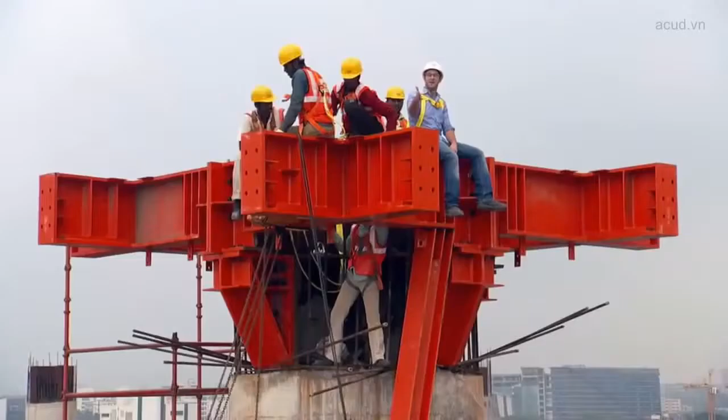My name is Danny Forster, and this is Build It Bigger. Here we go. As a designer, I have traveled the globe investigating amazing feats of architecture. And right now, I'm going to take you inside a building that is going to transform India.

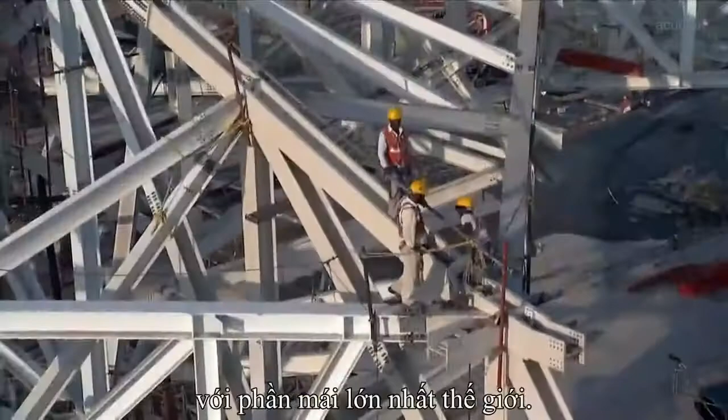Mumbai, the densest city on the planet, is remaking the most delayed airport in the world. The space challenges are enormous, yeah. A radical $2 billion airport to handle over 36,000 more flights a year. 12,000 workers are erecting a massive new terminal with one of the largest roofs ever built, held up by one of the most complex steel structures ever conceived.

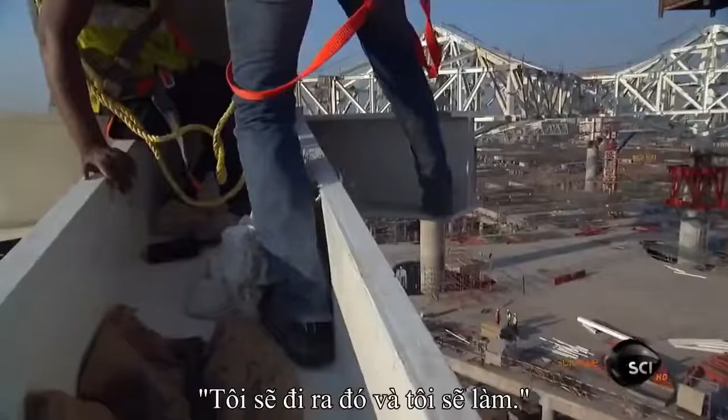God, look at that thing on top of that thing. That is amazing. All right next to an active runway. That's the airfield. That's literally where the planes land. Without canceling a single flight. Oh, I'm going out there, Winnie. I'm doing it. Are you kidding me?

So I just traveled 13 hours by plane to get here, and now I'm in Mumbai. With over 20 million people living here, it is the densest city on planet Earth. Located on the western coast of India, the city of Mumbai lies on an island just 3/4 the size of New York City, with more residents than the entire state of New York.

It's the financial capital of a country on the rise, generating nearly half of India's foreign trade. In about 3 years' time, India is going to surpass China to become the fastest growing economy in the world. But despite this incredible economic opportunity, India's infrastructure is crumbling. Only 40% of homes have running water. The majority of roads remain unpaved, and Asia's oldest railway carries 3 times its capacity.

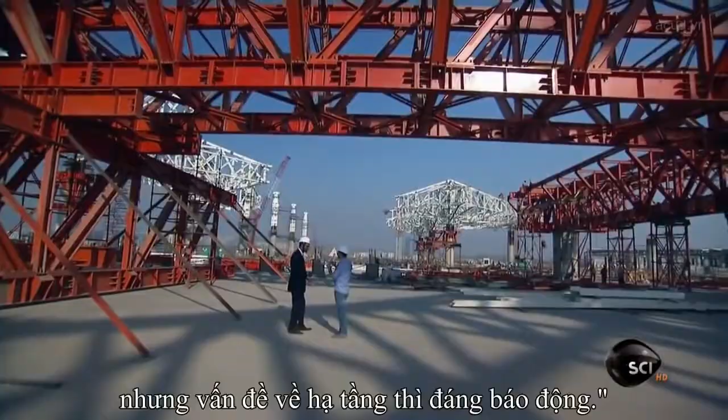There's the reality that economically the city is growing very rapidly, but that the infrastructure challenges are very serious. Mumbai has grown very rapidly and has a potential to become a world-class city. I think, any place you can rejuvenate it, and you need a catalyst for change. An important catalyst for Mumbai's $195 billion resurgence is also in the worst shape.

Chhatrapati Shivaji International Airport. Of their 650 daily flights, only half of them arrive on time, meaning that the city's only airport is in desperate need of an upgrade. So in order to sustain the city's growth and keep people coming back to Mumbai, they're embarking on one of the most complicated infrastructure projects in India's history. They're building a brand new airport.

Designed by SOM Architects, a revolutionary 4 million square foot terminal, topped by one of the largest roofs in the world, designed to handle 100 more flights a day, nearly doubling the airport's capacity to 45 million travelers each year. All built on the same spot as the country's second busiest airport. No one's ever built an airport in this tight a space.

Absolutely. And so in 4 years' time, the passenger capacity of this airport doubled. Doubled, exactly. So based upon the growth of the existing Mumbai airport, you couldn't stop it while you built the new terminal. We could not stop it. It's like doing an open heart surgery on a marathon runner while he's in the middle of a marathon.

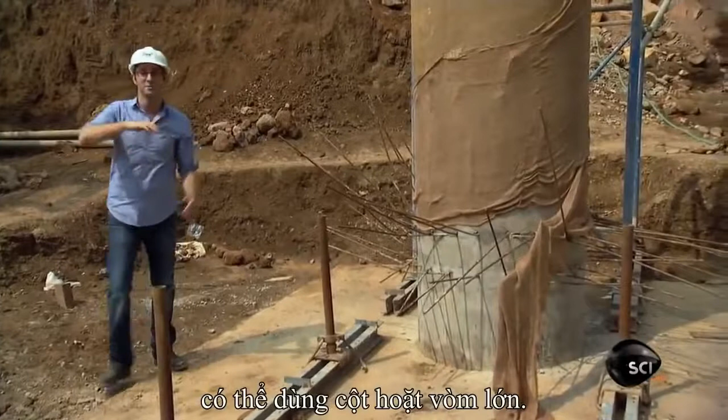Now, how you hold that roof up, whether it be through columns or huge arches, is what makes one airport different from another. Now, here in Mumbai, their roof is 17 acres in size, which means their columns are no ordinary columns. And today, we're going to build something called a mega column.

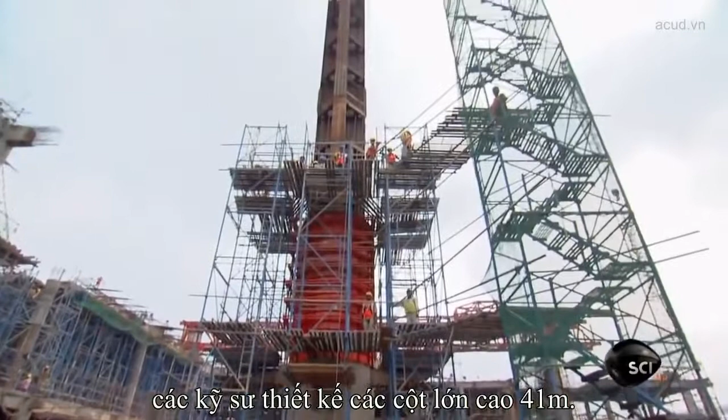This terminal roof is covered by a skin-like thermoplastic membrane spanning more than 10 city blocks. To hold up all 15,000 tons of it without compromising the space below, engineers created 135-foot-tall mega columns. So steel on the inside, and then we wrap that steel in a shell of concrete.

Right. This column itself, from foundation to the top, is taking at least 3.5 months to complete one job. 3.5 months to do one column. One column. I gotta tell you, I've seen a lot of columns in my day. I've never seen a column like that.

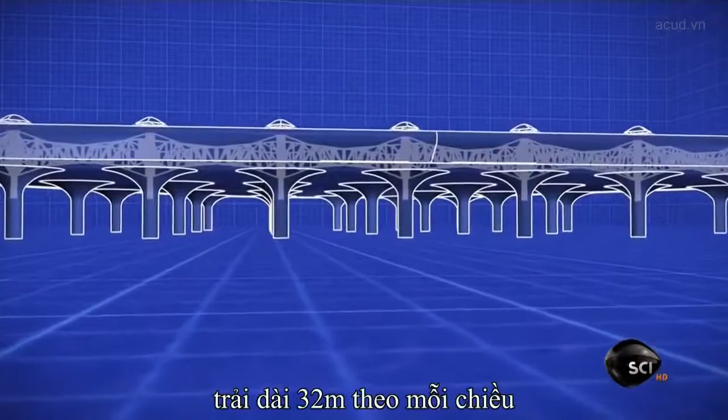Architects wanted to limit the number of mega columns to create openness inside the terminal. Typically, a roof this large would require 60 mega columns, one every 100 feet. Instead, they added flared steel caps called pods to top each of the mega columns. Spanning 105 feet out from the center in either direction, the pods transfer loads laterally and then down each mega column, allowing engineers to remove 30 mega columns and create a more open space for passengers.

So this incredible shape, this amazing umbrella shape, is not just because it looks cool. Correct. You're also able to give the people traveling a cathedral-like interior space. Right. It is a state-of-the-art design, and at the same time, it is a beautiful structure. These are incredible columns. Yeah. The whole project quite literally rests on these columns. And Mumbai is resting on that too.

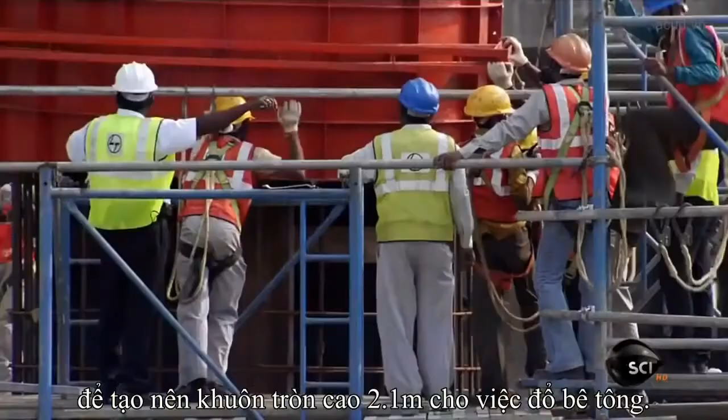With only 30 mega columns, they have to build each one strong enough to support 2,000 tons. Starting with a nearly 8-foot thick steel spine, it's reinforced with 10 tons of rebar. Crews then install the formwork, attaching 2 C-shaped steel sections to create a 7-foot-tall circular mold for the concrete.

Okay, so Uni, these right here, this is the actual formwork that we're putting onto the column. Correct. And this is just half of the formwork. This is half. Uni, these are very large columns. It is a very, very large column.

You and I could get an apartment in New York City together, and this would be our living room. And that would be a good apartment, Uni. We'd be happy about it.

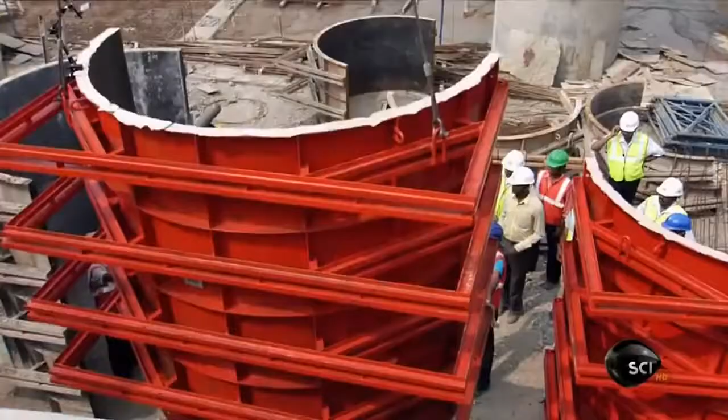Here we go. I got it. Because each pour requires 40 tons of concrete, this piece of formwork is made from 6-inch thick steel weighing 30 tons. It's heavier than I thought, huh? The tower crane lifts it 115 feet over the job site and into position. Now, this piece of formwork in the sky is not just going alongside the column, but rather over top it, sliding all the way down in position, just about right there.

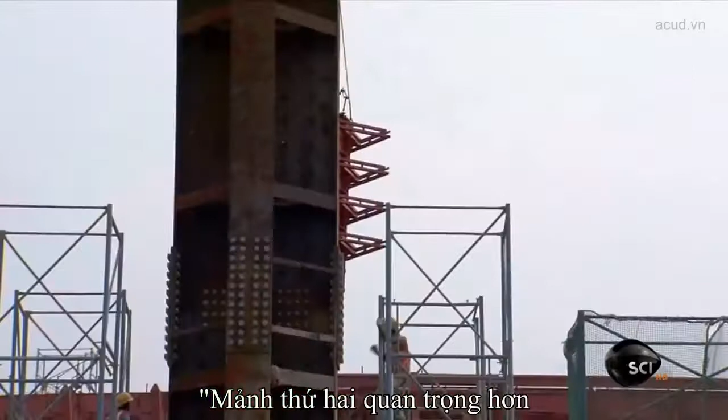With the first half of the mold in place, crews then lower the second half and connect the two together. The second piece is the most important. If you don't place it properly and if you don't bolt it properly, the alignment will get totally mismatched and it will be a mess of a job. So if the alignment of the formwork is not correct, the subsequent concrete pour is misaligned and the performance of the column is degraded. Yes, ma'am. Correct. Okay, let's get up there, baby.

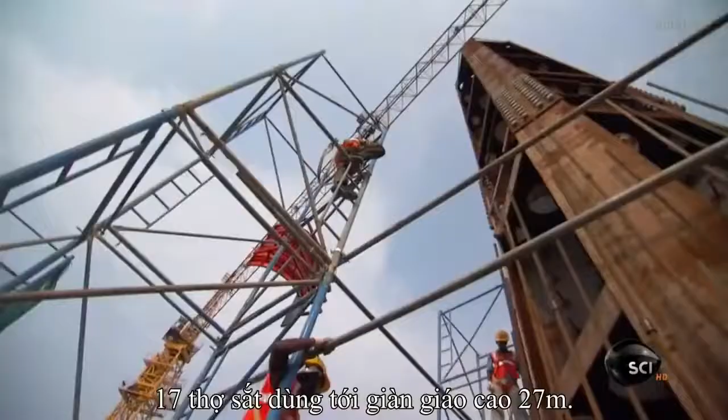Here we go. To guide this piece of formwork into place, 17 ironworkers spread out on aluminum scaffolding 90 feet off the ground, pulling it in with just 2 tag lines. Push karo. All right, I got it. Aane de. Not loving that. Push karo. Very good. Come on. Yeah, give it a push. Oh, the wind is trying to force this thing out. Very good. Come on. Yeah, perfect. We threaded between the scaffolding and steel a narrow 12-inch gap.

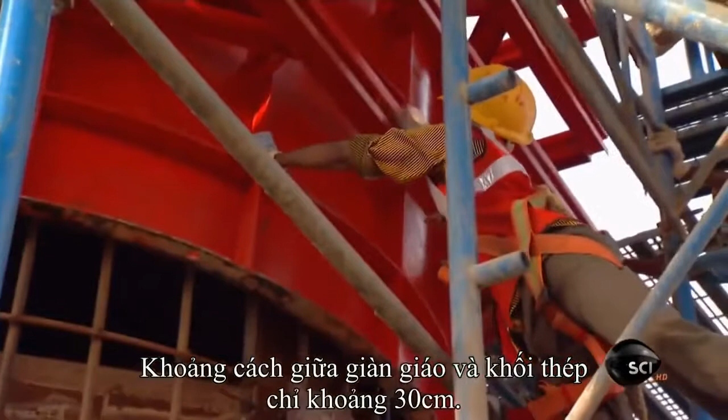Okay, here she comes. So as you bring it down, the idea is to keep it essentially where you want it, about 3 inches off the rebar. Panic process. You can hear it when tying off, retying. Essentially trying to move alongside this thing as we drop it. Whoa! But not the most amount of foot room. All right, come down more.

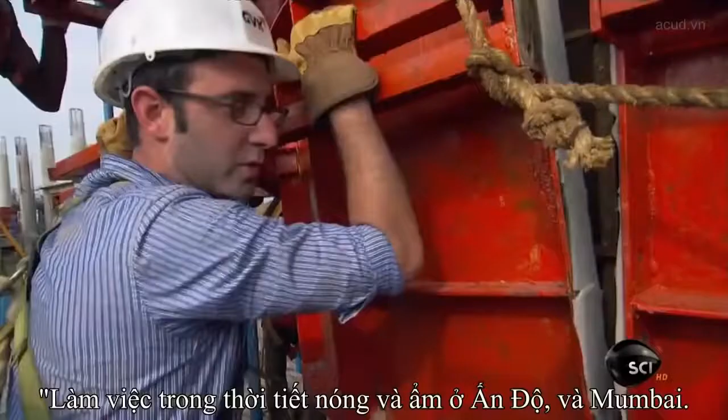With just 2-inch wide scaffolding for footing, they have to line it up within 1/10 of an inch, all in the sweltering 95-degree heat. You're working in India, in Mumbai. It's extraordinarily hot and humid, so while you're running and pushing and pulling, I mean, it's brutal. It's unbelievably brutal. Slowly. With no room to swing the crane, it takes all 34 hands to align the steel formwork. At this point, it's really about dudes with their arms, their legs, and their feet just physically holding it in place and lining it up.

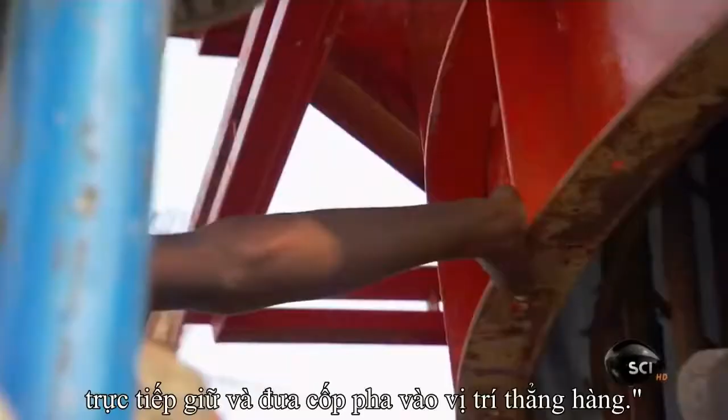Myself included. Arya. Okay. Arya. What does Arya mean, by the way? Bring down. Arya is down, all right. Arya. It's coming in. Yeah, it's about inches away. Very good. Coming in. Wow. There it is. Very nice. Look at this alignment right here. 2 holes practically lined up. The bolt's gonna pop right into place and bring these 2 pieces together.

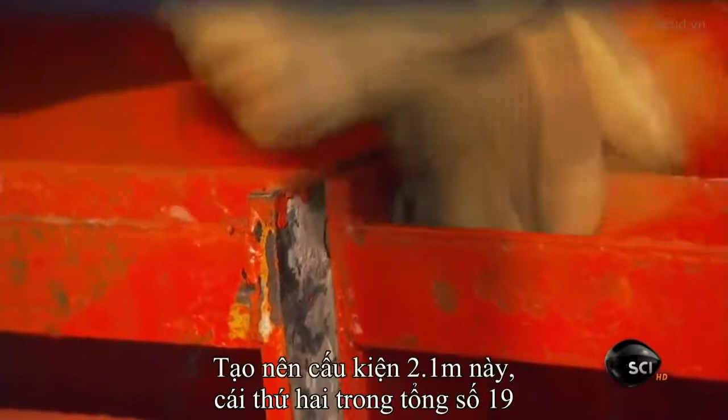Give me a bolt. 70 bolts lock the formwork together, making this 7-foot section the second of 19 that will come together to create a single mega column.

Now, lest you forget you're on a job site in Mumbai and one of the most amazing projects ever built, when they do something incredible, what do they do to celebrate? Have a cup of tea. Unbelievable. We're seriously having tea right now? Cheers, my friend. Cheers. Thank you, Danny. Amazing. I'm not gonna lie, I'm kind of hot. I could have gone for like a Gatorade or something.

Coming up, building one of the world's largest temporary structures. If you look at these bolts, it's like a 10-pound dumbbell. You do not want to drop the bolt. 200 feet above the job site. Oh, oh. Don't drop the bolt.

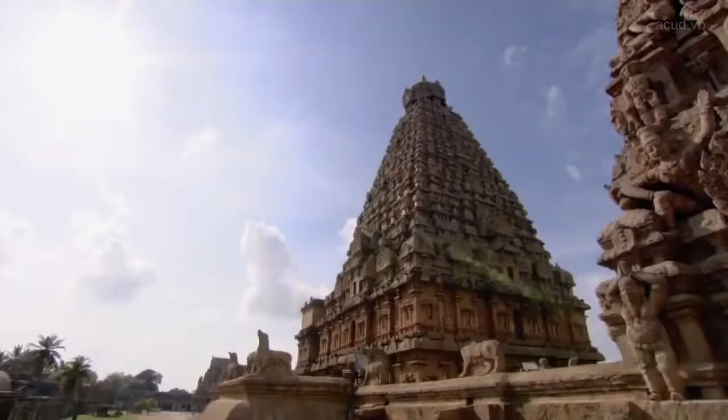India is the birthplace of Hinduism, the world's oldest religion. And with over 330 million deities and growing, countless shrines line Mumbai, honoring both immortals and mortals like Chhatrapati Shivaji, whom the city's new airport is named after. Chhatrapati Shivaji was a 17th century ruler over this portion of Western India. Now, he was so revered by his people that he was elevated to the status of a god.

Now, what do you do if a statue of that deity just happens to be located right smack in the middle of your construction site? Well, you build around it. On most construction sites, builders would use up to 10 tower cranes to lift and complete this 17-acre roof in just 8 months. Here, keeping the shrine open to worshipers means keeping cranes out of this 6,000 square foot area right in the center of the entire project.

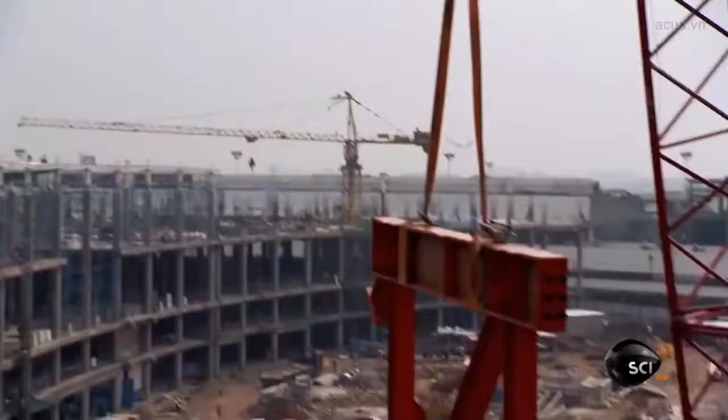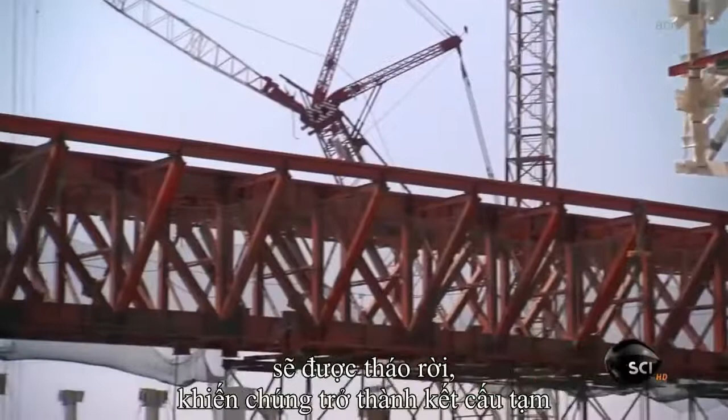With cranes restricted to the perimeter, engineers designed an amazing solution. A quarter-mile elevated track called a highway truss, composed of over 4,000 individual steel segments. This unprecedented rail system allows crews to move structural caps called pods atop all 30 megacolumns without blocking access to the shrine below. Once the roof is finished, this entire 1,270-ton structure will be taken apart, making it one of the largest temporary structures ever built. And right now, they're installing piece number 1,000.

So you actually invented this system. You designed it specifically because the site is so constrained with housing over there, the airport over there, with Chhatrapati statue over there. You just have no room to work. Absolutely right. And to work with this kind of constraints, it is very challenging assignment for all of us. You cannot take a crane inside, you cannot take any lifting machines. Everything is depending upon this highway truss.

Let's do it. You ready? Yeah, we are ready. Okay, I'm ready. Uni obviously is born ready. Look at the face. Okay. Was there ever an image of preparedness more so than Uni?

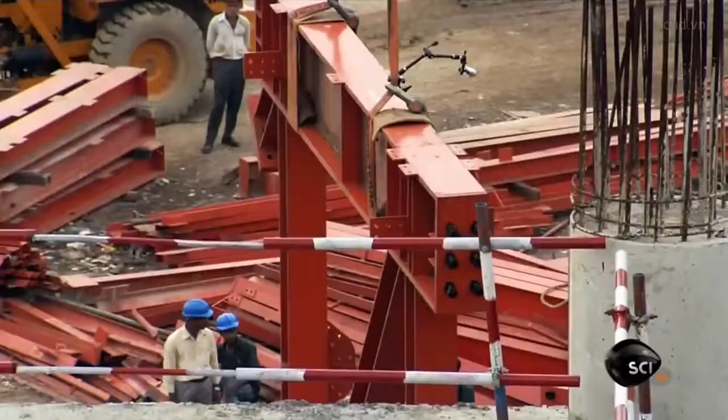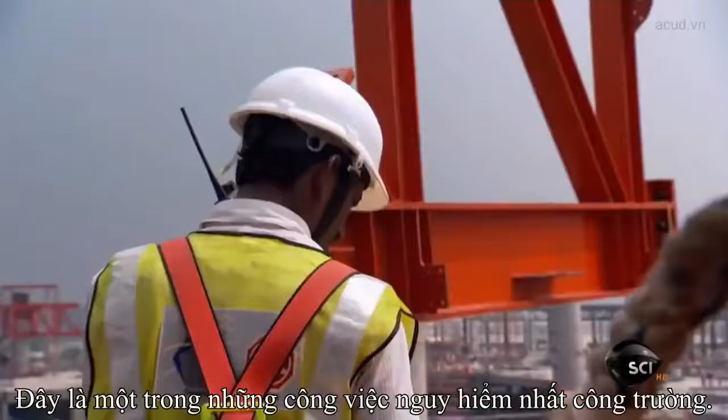All right, going up. There she goes, nice and easy. And what's so incredible is that this huge piece of steel above my head right now looks like it's for a bridge or a skyscraper, but that whole thing is just temporary. This piece will eventually support the 275-ton steel pod. All right, let's go. But at the moment, it's the lack of steel 200 feet up that's making this one of the most dangerous jobs on site.

Okay. Whew. All right, so just to put in perspective, behind me is the airport, right? We're actually over top the airport, and what I'm walking on right now is the actual highway truss.

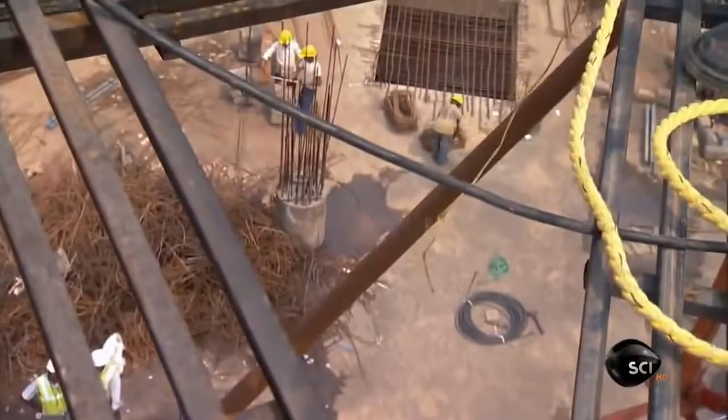Oh, you gotta be kidding me with this, fellas. Uni! Sorry, extremely sorry. Exactly. I understand your difficulties. Fellas! Yeah! That is a rough spot. Someone drew the short straw, huh? Okay, Uni, I'm ready. Your two very, very unfortunate gentlemen are ready. Everybody is ready. Let's install some steel.

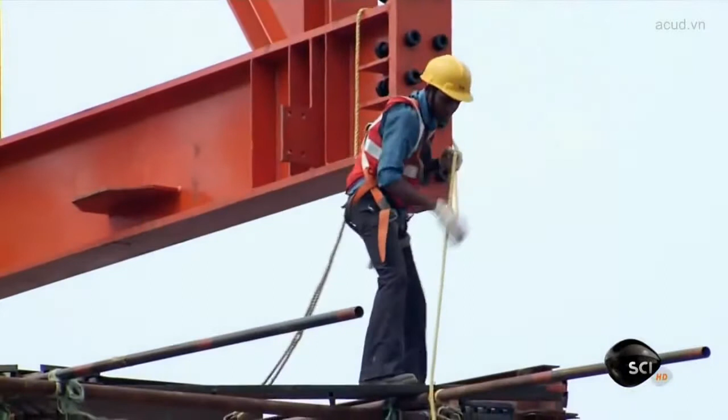Okay, want to bring it in? Let's do it. Let's get out to this edge. My friend, I'm gonna get out here with you. Wishing I wasn't. Whoa! This has got a lot of bounce to it. It's got a little, yeah, no? You can't be loving that. Look at this guy, he's like a badass on the steel here, huh? He is walking out on a plank to nowhere to get that tie rope off there. That is a seriously rugged job right there.

Here she comes. Okay. Each segment is locked to the preceding piece of highway truss with 20 bolts, each weighing 10 pounds. If you look at the size of these bolts, they're really enormous. I mean, it's like a 10-pound dumbbell. You do not want to drop the bolt. Oh!

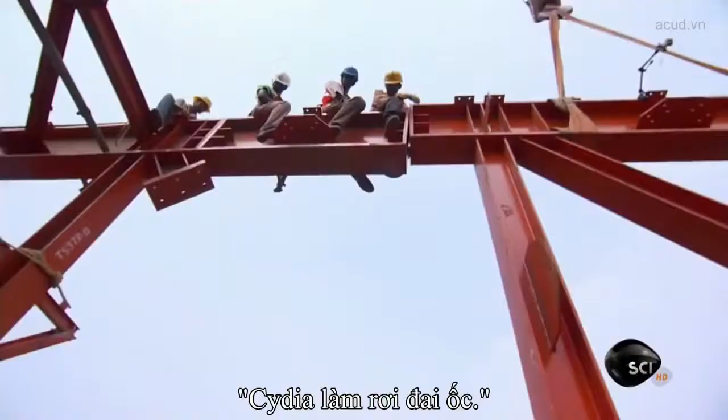Okay. Hey, aram se. Cydia, drop the bolt. Danny, you can see the top. It is perfectly aligned. It is bringing down now. Yep, it's coming down right here. And you can see, like any piece of iron working, after the big hoist, the crane does its work, then the job falls to these guys right here to literally align bolt holes within millimeters. Come closer.

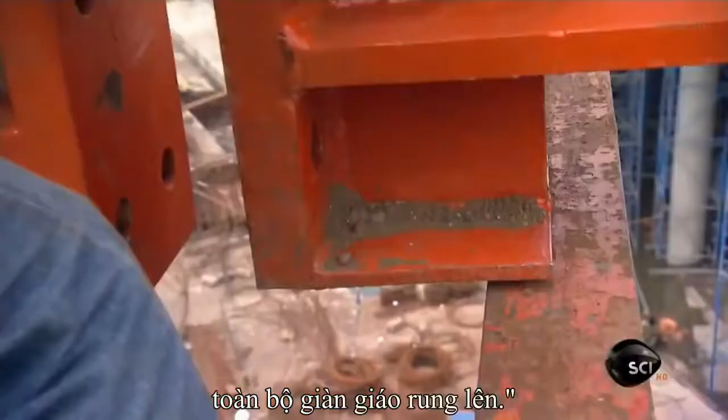Now, it's important that I point out right now, as we're doing that, what that steel is hitting, that orange piece of steel, is the temporary structure on which we're standing. So every time he bumps that, this entire scaffolding shakes. Just feel the whole truss move, just like a diving board. Using a chain block that acts like a winch, workers pivot the 3.5-ton piece into place. Okay, stop. All right, we got it. We got one in. We got one in.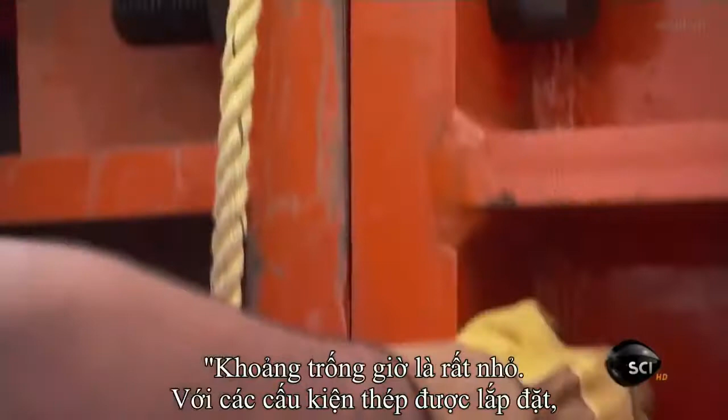Nice. Each segment takes 3 hours to install, extending the highway truss just 15 feet, meaning that it'll take crews 3 more months to finish. Look at this gap. Almost seamless. So with this new piece of steel now installed, you can really understand why it is they call this a highway truss. Because it's on this elevated steel system that the pods will travel over the building and cap off

the 30 mega columns. Coming up, an airport built with an entirely glass facade, keep her tight, keep her tight, right next door to an active runway.

Mumbai's aging airport was built 70 years ago. Once isolated 23 miles from downtown, today it's an island in a sea of people. Surrounded by nearly 500,000 residents living in one of the city's largest slums called Azad Nagar. This is really one of the more staggering aspects of this project. I'm driving into a neighborhood, and that wall right there, on the other side of that barbed wire, that's the airfield. That's literally where the planes land.

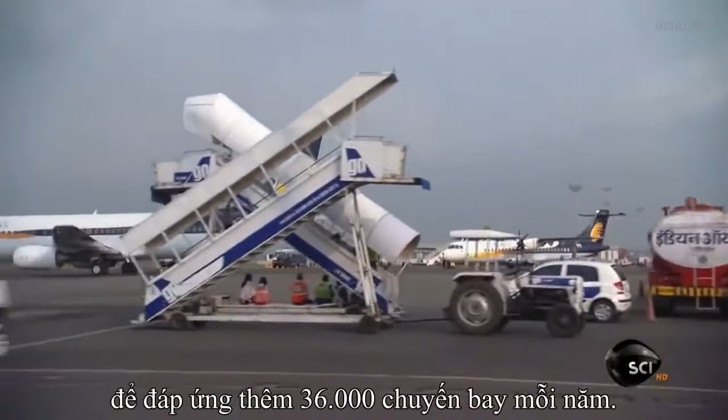Currently handling a fifth of all of India's air traffic, architects of the new airport had to double the capacity. Now, they would ideally add a second terminal to accommodate the 36,000 more flights each year, but not an option with a population the size of Miami living around the airport. The space constraints surrounding the construction of this terminal are unlike really any other airport in the world. Forget about anywhere in the world.

In Delhi, they have about 5,000 acres. In Hyderabad, they have 5,500. Bangalore, they have 4,000. Of course, if you compare similar size airports in other parts of Asia, Kuala Lumpur has 30,000 acres. Same number of passengers in Kuala Lumpur, and they have 30,000 acres. And you have 1,200. Instead of building a second terminal, architects created one innovative structure that maximizes every inch of space.

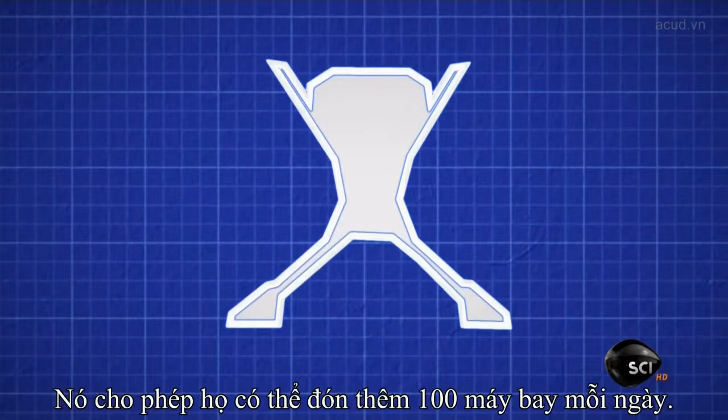If you want to increase the traffic in your airport, you have to add more planes. But if you want to add more planes, you need to have more gates. And in airport design, the number of gates you can have is directly related to the amount of surface area. Most airport terminals are long, narrow boxes that stretch for over a mile. Limited by just 2,100 feet of horizontal space, Mumbai's new terminal would only have 31 gates. So architects pinched the terminal on 3 sides, creating an extra 700 feet of surface area for more gates. This allows them to handle an additional 100 planes each day.

Because architects wanted people to see those same planes, they designed an all-glass terminal that requires workers to build a 1 million square foot glass facade, one of the largest ever built, right next to an active runway. There's something really romantic about the fact that you're flying to a new exotic location, you're taking these enormous planes, and you actually do want to look at them. You go to any corner of the building and you can view it outside. It is only glass. Everyone enjoys looking at the planes take off and land. It's exciting. I find something amazing in it.

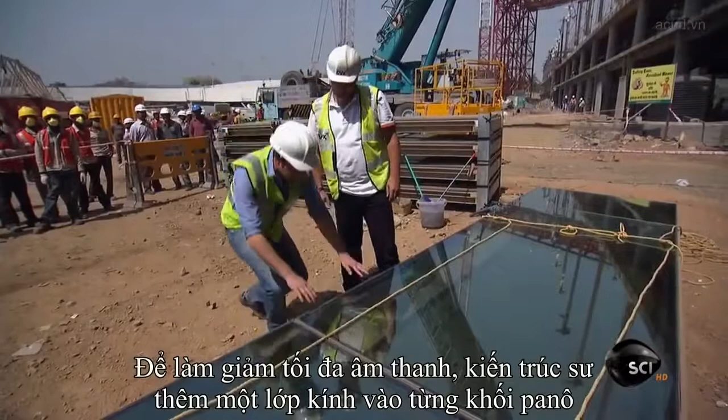Yeah, absolutely. I mean, there is something amazing about it, but at the same time, the turbines of a jet engine, they roar. So there's a kind of a complicated issue with a glass airport in that you want to see the planes, but you don't want to hear the planes. Outside, engine noise can reach upwards of 140 decibels. Louder than a rock concert. So to minimize sound inside, architects added a second layer of glass to each panel, creating a half-inch gap between the panes. This reduces noise to 40 decibels, just louder than a whisper.

You get the full visual of the planes landing and taking off. But not the sound. It will minimize a hell of a lot of the sound. But the nice thing when you bring your family to go on holiday, the kids like to look at the jets landing and taking off without having to bash their ears because of the noise.

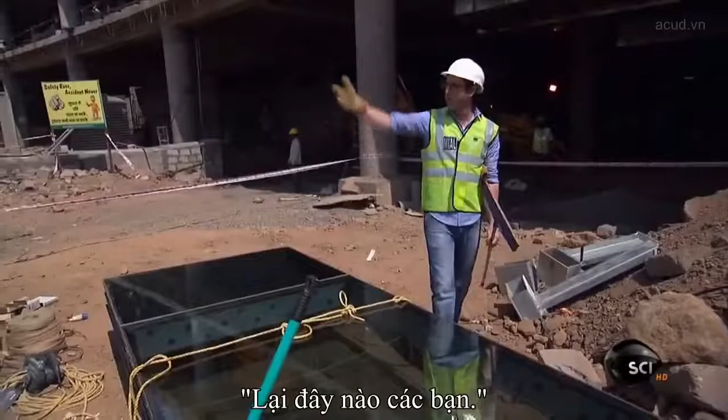With monsoon season approaching in just 4 months, dropping an inch of rain per day, 5 glazing teams called gangs are working simultaneously, hanging 125 panels each day. Boys, come on in here. This is my new gang. We like to call ourselves the Face Masks. This is our turf, our neighborhood, and we're gonna hang 25 panels of glass today, right?

Why is everyone wearing a face mask? Is there like a particulate that I should be mindful of, or an airborne bacterial issue regarding the glass? You know what it probably is. I know what it is. It's not actually anything to do with bacteria. It's about us just being an outlaw gang of marauders, hiding our identity from all the hijinks that we do.

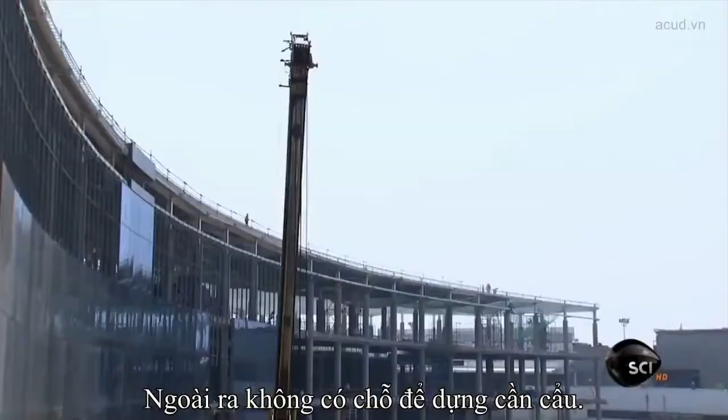Planes land just 2,000 feet from this part of the terminal, meaning the job site is just covered in debris. And also, there's no room for a tall tower crane. Here we go. Instead, they lift each 1,000-pound panel with a specialized 11-foot wide mobile crane, no bigger than a Mack truck. Keep her tight, keep her tight. Oh. Hold on. 20 feet up, crews tie off to steel scaffolding and lean out over the edge of the building to await the glass panel.

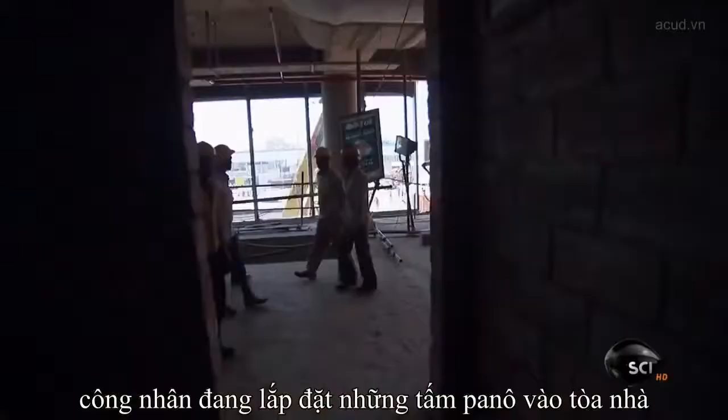And here is the glass panel right here. Here we are. So now, coming out to the edge of the building here, tying off, and here she comes. Here comes the panel, about 12 feet tall. Let's get hands on it, boys. Get some hands. This panel's outfitted with 3 interlocking brackets that snap into the edge of the adjacent piece. Knock it out. Here we go. Bring it in. An innovative design that allows the crew to install each panel in less than 30 minutes.

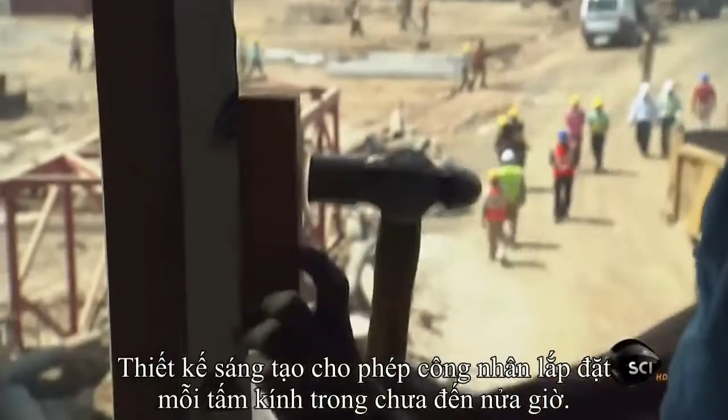It took the gang just a matter of moments to hang a single glass panel. But keep in mind, in order to wrap the facade of every inch of this curving terminal, these guys will end up hanging over 1 million square feet of glass.

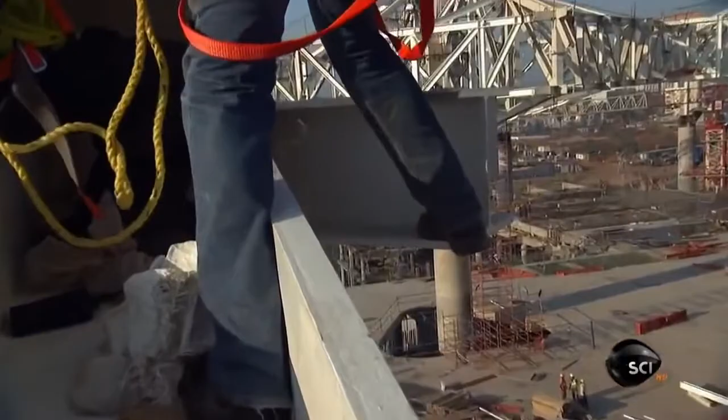Coming up, installing a steel section larger than a city bus on a steel beam only 8 inches thick. I'm going out there, Winnie. I'm doing it. When this thing comes down, if it slides forward, it is going to crush me. So I got to be able to move quickly. But first, what is the largest airport in the world? The answer after the break. Here's your trivia answer. Saudi Arabia's King Fahd International Airport, at over 300 square miles, it's nearly 10 times bigger than Manhattan.

India's economy has tripled in just 10 years, giving many people their first opportunity to fly. With the highest percentage of first-time flyers in the world leaving Mumbai's crowded airport, every departure is an event. When you land in a given city and you leave the airport, it's a very common custom that you might have friends or family meet you there. Now here in India, when you're getting ready to leave the city, because it's such a big event, your mom, your brother, your cousins all come to the departure gate to see you off. So for every 1 Indian traveler, you end up with an entire family event.

Is this his first time leaving Mumbai? First time. And so we have a brother-in-law, wife, sister, daughter, uncle, cousin, niece, nephew, sister-in-law, son, brother, friend, some dude who's just hanging out. The whole family's come. Literally over 15 people have come to say goodbye to this guy.

Nearly 40,000 people gather in front of this airport every day, with only a narrow 12-foot curbside to stand. So Mumbai's new airport is attempting to accommodate both passengers and their families. So the design of the architecture takes into account this very unique cultural condition and makes it part of the building. Absolutely. We have to acknowledge that this is the way people do things here, that people want to come to the airport, they want to be with their family when they say goodbye. A lot of people here in India are traveling for the first time. It's a modernizing country. This is a new thing for people.

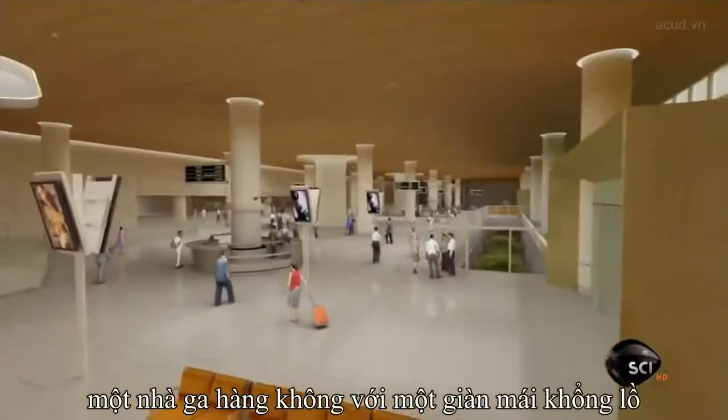If you think about it, an airport terminal is really just a gigantic roof under which you have arrivals and check-in and security. The question is, how do you hold it up? Well, a typical solution is just to use columns, big vertical elements that take up this massive horizontal load. But the architects of this terminal wanted you to walk in and just be blown away by the massive openness. So to create that, they removed 50% of the columns. Problem is, how do you then hold up the roof?

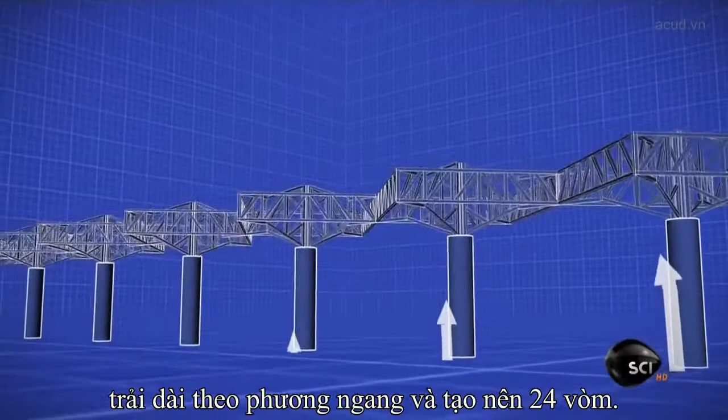To do it, they invented something called a pod. Built on top of each megacolumn, these pods are 55-foot tall steel support structures that stretch out laterally to create 24 individual arches. Now, by linking all 30 megacolumns into one interconnected steel frame, loads can be transferred out and then down through the columns, allowing engineers to hold up the entire 15,000-ton roof without compromising open space for the passengers below.

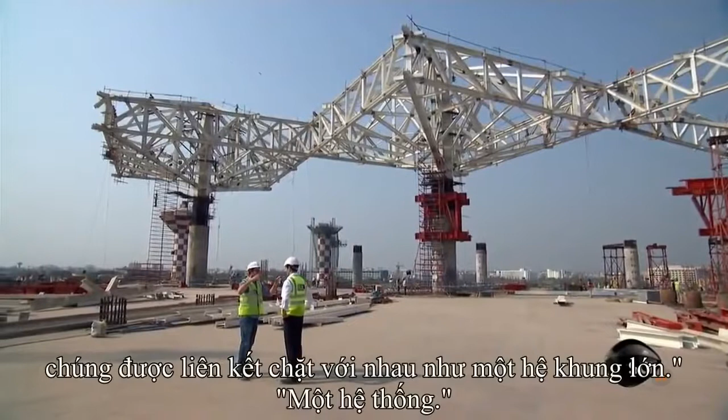So the columns are coming out, in some cases, 100 feet unsupported like gigantic flagpoles, which would otherwise almost want to kind of move in the wind. And this enormous pod steel structure is tying the entire thing together. That's right. It's a uniform structure, acts as a kind of mega truss all together. So you can't have one part acting without the other part. It all acts in unison. So when I look up at this pod or that pod or that pod, the reality is they really are tied together like one enormous frame. One system.

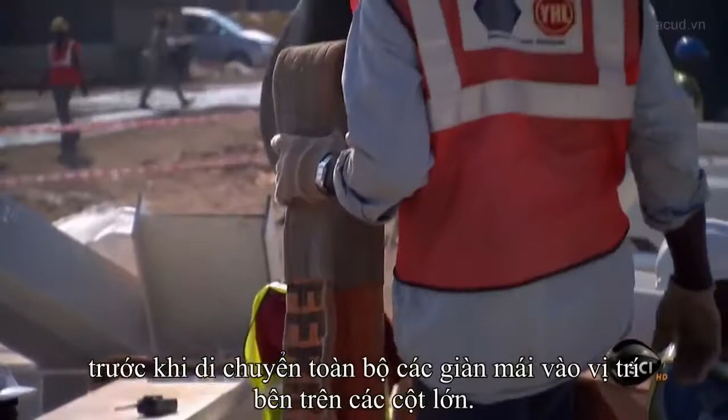So, Uni, this right here, this is the perimeter truss. So we're gonna lift this piece by the crane, take it up. That's gonna go right there, connecting those two wing trusses, right? Yeah. It has come in two pieces. These two pieces are welded and made into a single piece. It is getting assembled here, and it is lifted by the crane and again assembled at the top.

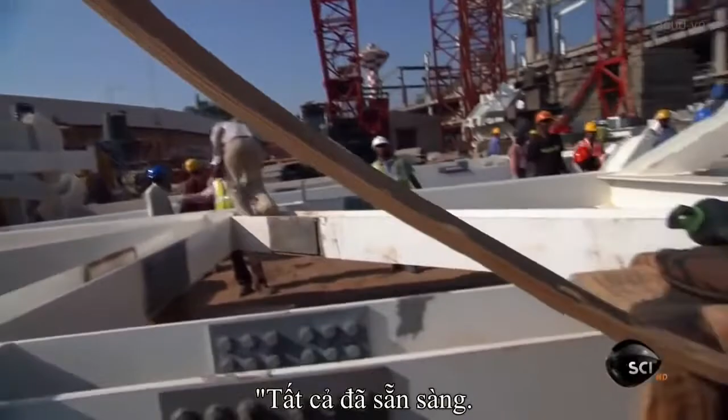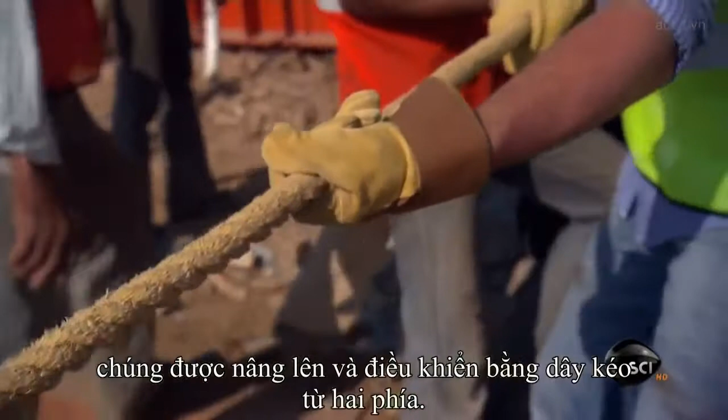All right, me and my squad are ready to go. We got tension in the line. The crane's gonna pick up this amazing, enormous perimeter truss. We'll keep it level, and then we're gonna send it over 100 feet in the air to the top of that pod. All right, boys, here we go. At over 60 feet long, the perimeter truss forms just one side of the pod, making for an unwieldy lift that's controlled using tag lines on either side. Give me some tension. Come on now, give me some tension.

Bridge truss is starting its flight in the air, which means you and me must begin our flight on foot to get up there. How do we get there? We will go there. Come on. Lead the way. Yeah. I love this man.

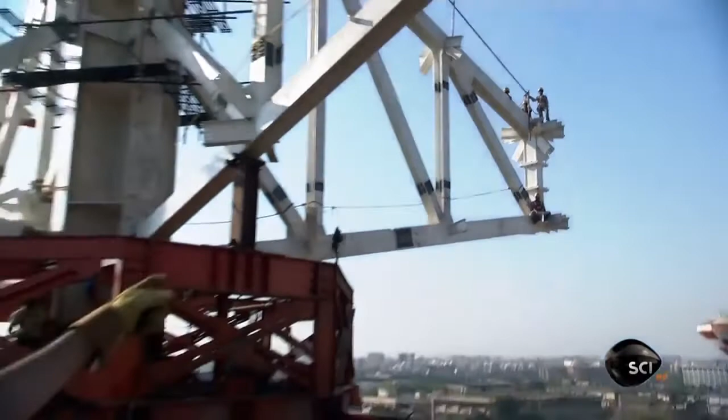I love this man. Hard to control on the ground, 100 feet up, crews position this perimeter truss from the very edge of the pod. See those little dudes hanging out right there on the edge of the steel? That's where I'm going. Hello, boys! Oh, God. There it is. Oh, I'm going out there, Winnie. I'm doing it. Cantilevered 60 feet out from the edge of the highway truss means maneuvering on a beam just 8 inches wide. Made even harder by the 5 support braces blocking our access.

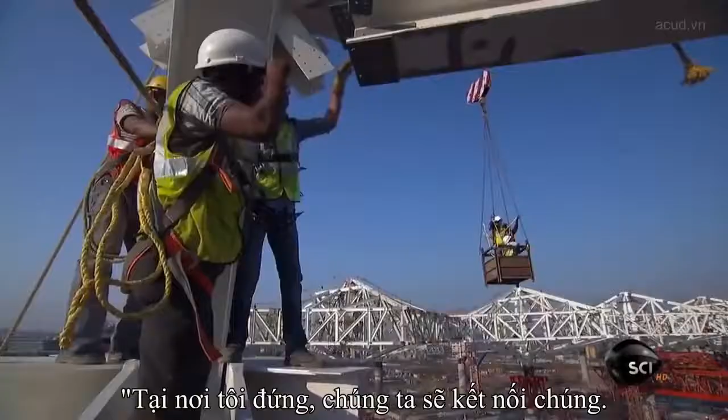It's from this flange on which I'm standing that we're going to connect the bridge truss. So it's this piece here and these holes in the plate that we have to bring down and line up. The issue is when this thing comes down, if it slides forward, it is going to crush me. So I got to be able to move quickly if it does move.

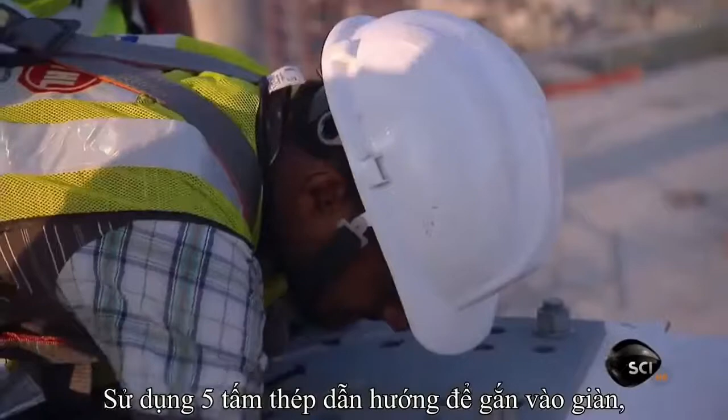It takes a team of 8 ironworkers located at each of the 4 corners to pull the 13-foot tall piece of steel into position. So the guys above my head are tightening up their bolts. We're about to lock up our bolts. Once this side is good and tight, we're going to swing the piece in and lock up the far corner. Using 5 steel guide plates mounted to the truss, the team lines up 16 bolt holes on each corner. Right now, one plate is off by a fraction of an inch.

All right, so Razag, despite his somewhat modest size, is going to use all of his oomph to physically push the piece over. And as it swings, I'm going to stab the holes and ideally nail it just as it passes over. Razag, you can do this. You can do this. Come on, baby.

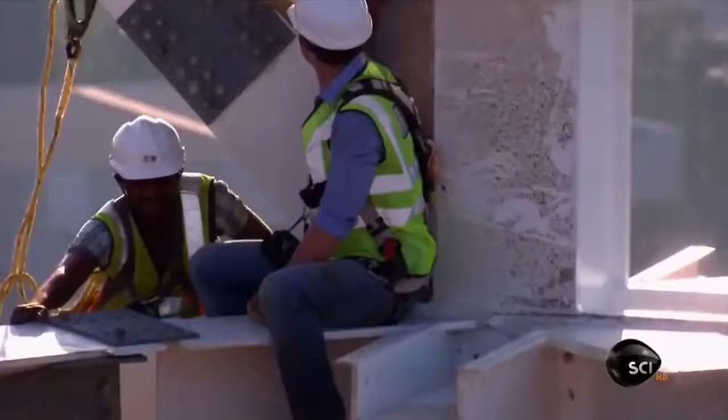Okay. No, a little more. One more. No, one more. Come on, come on. Come on. There, no, I need more, I need more. I need more. Yeah, I got it, I got it. Woo! I got it. Uni! You enjoy it now? I'm loving it, Uni. Loving it.

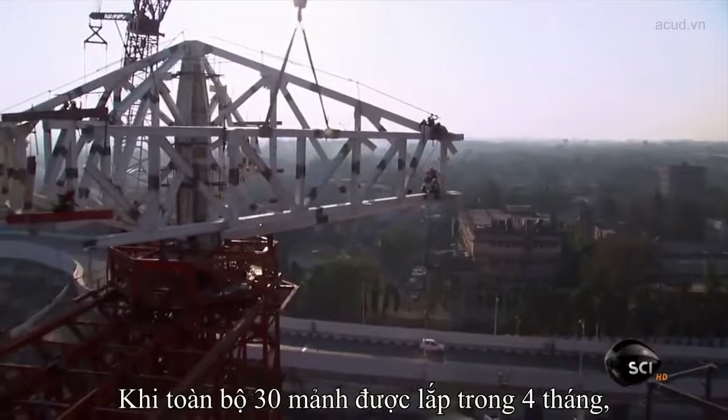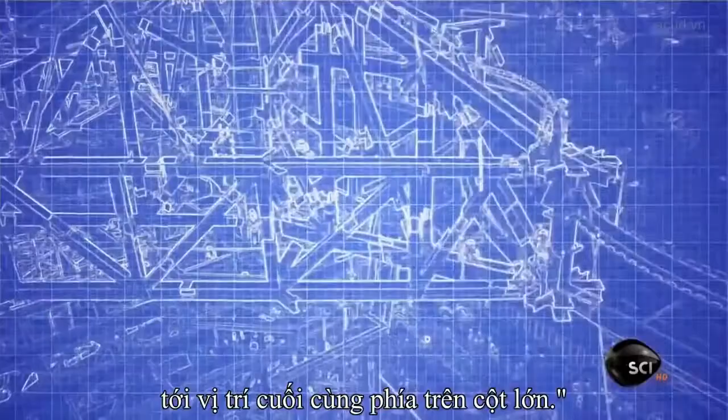The plates are now lined up. I can see straight through this hole. It's now time for some bolting. The perimeter truss is secured with nearly 200 individual bolts. When all 30 pieces are completed in 4 months, they will have aligned over 10,000 bolts. Once all 4 perimeter trusses are bolted in place, then the pod is ready. Then all 275 tons of it are going to literally slide over top of the building to its final location atop the mega column.

Coming up, erecting a 6-lane highway over one of the densest parts of this city means driving a flatbed truck through insane traffic. You got to be kidding me. We're not crossing this road. Oh!

In just 2 years, Mumbai is expecting over 36,000 more annual flights to arrive. While the new airport is attempting to handle this spike in air traffic, the car traffic arriving at the airport is an even bigger problem. Because outdated roads just can't handle the 3.5 million cars that clog Mumbai streets every day. The Chhatrapati Shivaji International Terminal is the only international airport not connected by a major highway. So if you want to take a flight out of this airport, the only road you can take is this one right here. And as you can see, it can take hours.

On this narrow 2.5-mile stretch, traffic rarely tops 5 miles an hour, cutting directly through a neighborhood where more than 90,000 families live. So, Dharminder, you're sitting in traffic, there's rickshaws everywhere, it's honking, it's going crazy. Does it just drive you mad? We go so crazy, so furious. We are not moving a bloody inch in the last 15 minutes. In Mumbai, it's very difficult to put your vehicle in 3rd gear. You're always in first and second gear.

That's it. That has to be, I can agree, one of the single most frustrating and anxiety-provoking feelings, fearing you're going to miss the plane. And you can't do anything on it. You can do nothing. You are powerless in the face of traffic. You can't do anything on that. Right.

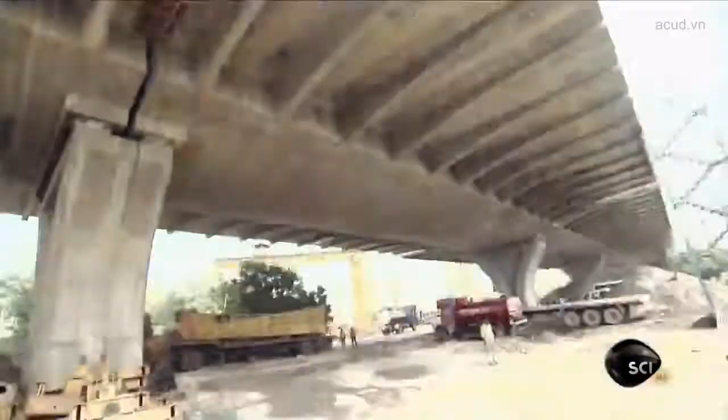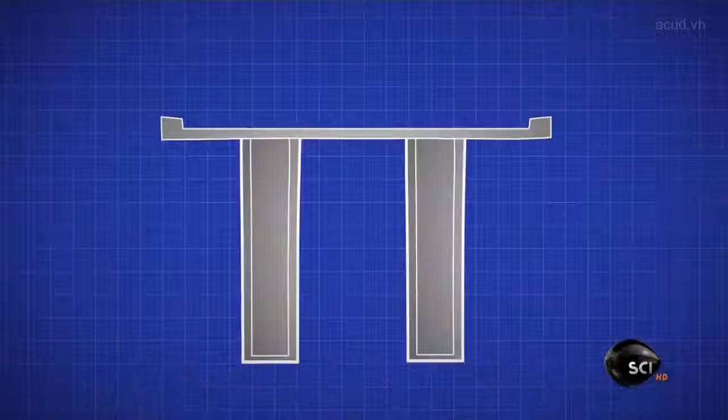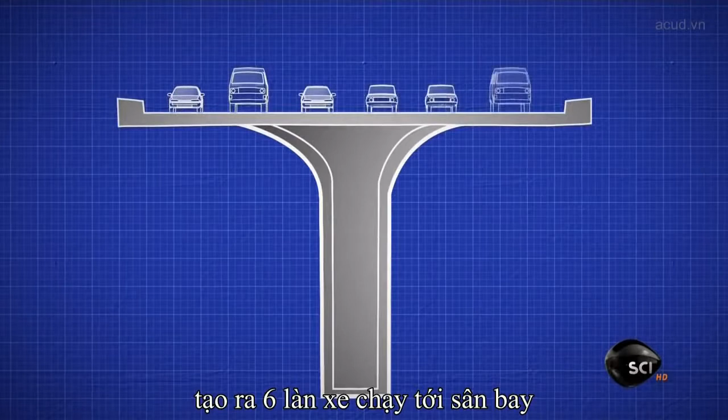2 sets of vertical columns support most elevated highways, each 50 feet apart on either side of the span. But more columns means less space for the road below. At Mumbai's new airport, engineers are suspending the entire 90-foot wide highway from a single row of arching columns. By widening the top of each column by 12 feet, they cantilever 2 30-foot long sections of road deck, creating 6 floating lanes to the airport without obstructing roads or neighborhoods below.

Crews fabricate the over 12,000 pieces of road deck in a storage yard over a mile away. Okay, there we go. They then transport each piece to the location on flatbed truck. Easily one of the most harrowing parts of the job. All right, now to give you a sense of just how complicated this job is. We're not building this highway out in a field somewhere. We're gonna get this piece into location by going right through dense Mumbai traffic.

Right, Ali, let's do this. Yeah, I know you know. It's not about the words, baby, it's about the feelings.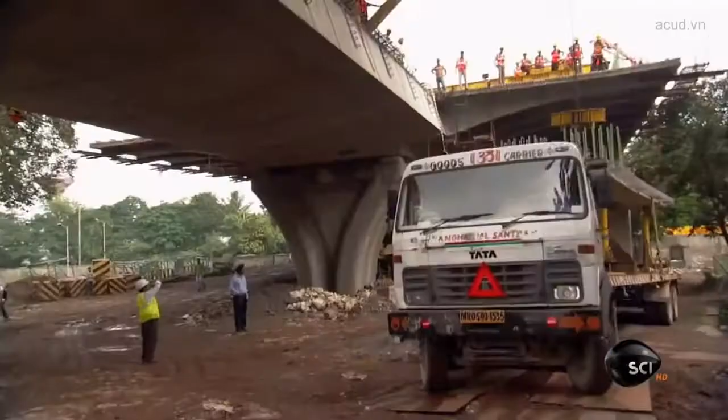All right, we're going in. With the concrete in tow. You gotta be kidding me, we're not crossing this road. Look at this. It's like playing a game of Frogger. I mean, you read it on paper that Mumbai is the densest city in the world, that there are 20 million people living here, but you don't really get it until you try and actually cross the highway in a flatbed with a piece of concrete behind you. Oh my God. Madness, look at this. Wahid Ali, I'm not gonna lie, I thought you were gonna clip that rickshaw.

After crossing 5 lanes of traffic, Wahid Ali now contends with one of the city's busiest roads. This is incredible. I mean, there are slums right over there. There are dense apartment buildings. There are cars everywhere, rickshaws and people. Wahid Ali, are you stressed? Are you okay? What's happening?

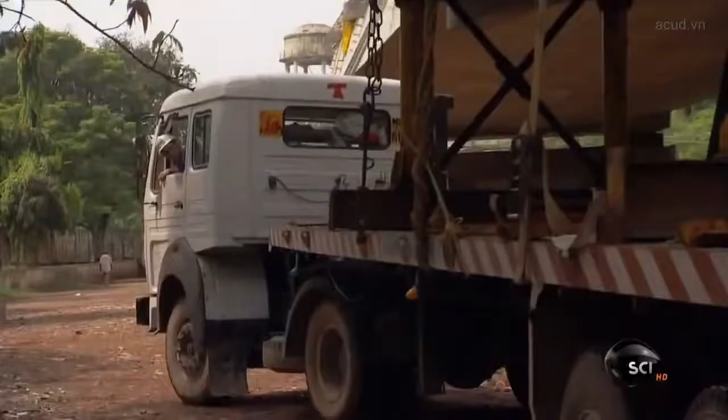The crew not only contends with the roads, but also a cramped worksite, where they have just 2,000 square feet of space to position this section for the lift. On the left? Yeah, keep cutting it. This is nasty parallel parking, by the way. Look at this. Wahid Ali! Very impressive. Very, very impressive. I want to tell you right now, I would challenge any American cab driver to come here, take this piece of concrete, and navigate it through what this man just did.

Good stuff. Give me a hug. Not gonna happen, but we did it. We're here. We're ready to install it. Should we go?

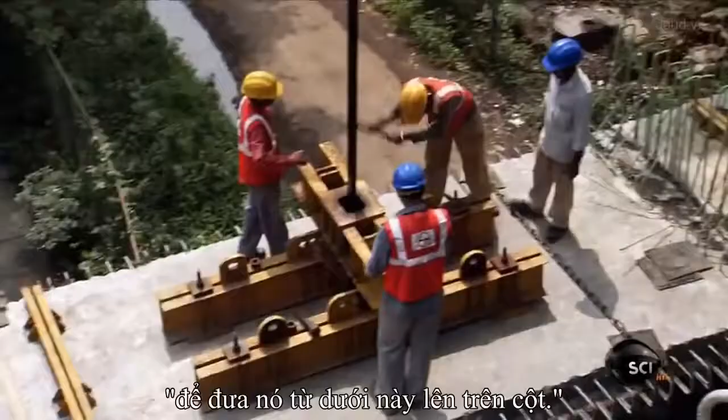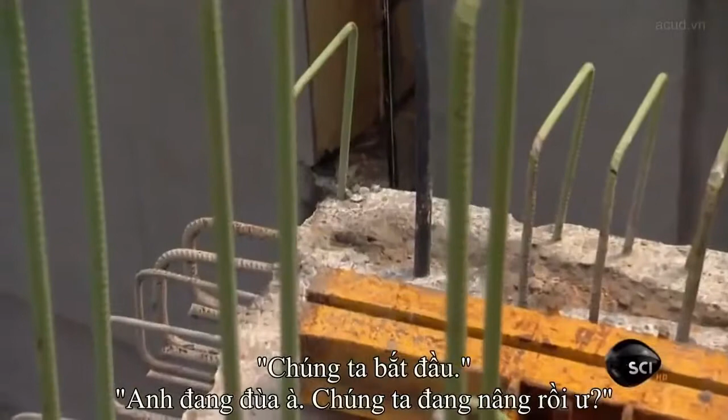So the next step is to attach a strand jack, this lifting mechanism, to the piece in order to get it from down here up top. Using 2-inch diameter steel bolts, we secure the piece to the strand jack to send it up 40 feet. Get that in there. Tie that bolt. This lift has to happen quickly because right now, this 25-ton piece of road deck is just 10 feet from someone's home. Danny, it's going up. Are you kidding me? You're lifting me. Wait, we're lifting right now? Yeah, it has started lifting.

You know, it's funny. Everyone's laughing now. You want to keep going? Yeah. Okay, so cardinal rule of safety: before the lift begins, get off the piece which is being lifted. We didn't do that, so I'm actually standing on the 25-ton segment. The strand jack has taken the load, and as you can see, we're floating. Already the jagah nahi hai. A little bit sketchy. I guess that's a first for me. I come to India for new cultural experiences, and this is a new construction experience. I'm surfing, except instead of a surfboard, it's a 25-ton piece of road deck.

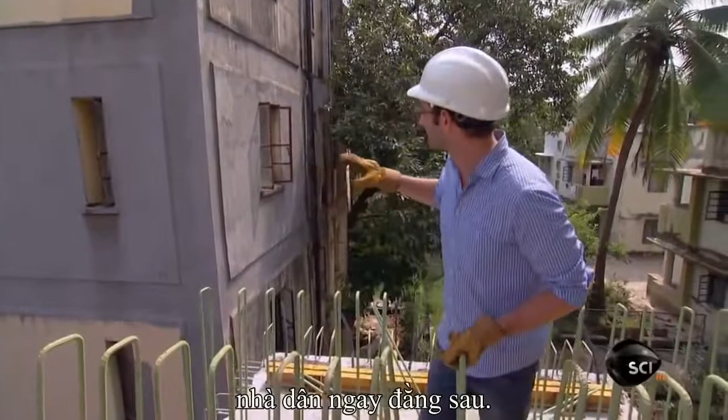The lift takes less than an hour. The installation will take another 3 hours. And by nightfall, this highway will have grown by an additional 10 feet. I have to say, for years it's been a dream of mine to actually have the opportunity to ride a piece up during a lift, and for years I've been thwarted. But right now, in Mumbai, I'm doing it. Standing on a 25-ton piece of concrete with a highway to my right and an apartment building directly behind me. This is heavy construction in the heart of Mumbai.

Coming up, a 275-ton pod moves the length of a football field. One more. One more. Without the use of a single crane. Come on, baby, give it to us.

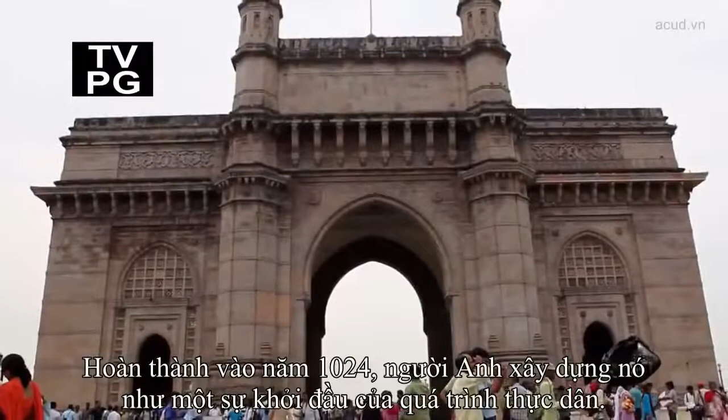The Gateway of India is located in South Mumbai. Completed in 1924, the British built this monument as the entrance to their colony. Over 60 years after India's independence, Mumbai is building a new point of entry, the brand new Chhatrapati Shivaji International Airport. A building like this does become a kind of a gateway or kind of a front door to a city or a country. Absolutely. I think these kinds of facilities somehow showcase India to the world. So we want people to remember India when they leave, and of course keep in mind Mumbai when they arrive.

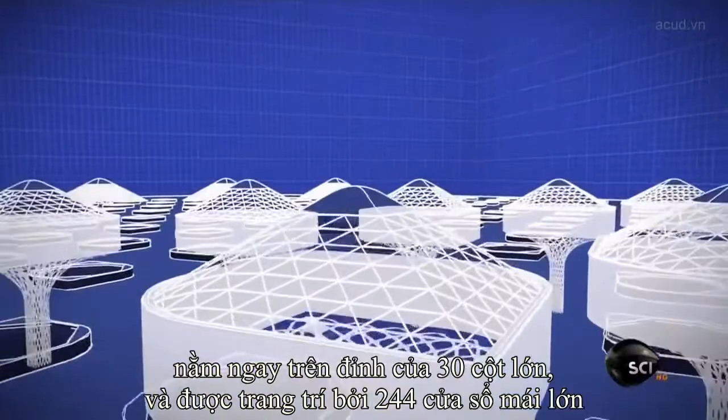The defining feature of this new gateway, the 17-acre membrane roof, will be held up by 30 perfectly positioned pods sitting atop each mega column and topped by 244 massive skylights, making this the most innovative roof in India. Without using a single crane, crews are preparing to move the 8th fully assembled pod 300 feet along the highway truss, a milestone 1 month in the making. So essentially the highway truss system lets you theoretically take one of these pods and move it anywhere in the X or Y axis.

I can't afford to have a crane using up a lot of space at site for the erection of a pod. So the best way was I build a highway truss on top, I assemble the pod in one location and transport it to its required location without affecting the work below. So while this pod is traveling over the site, below where we're standing, work continues.

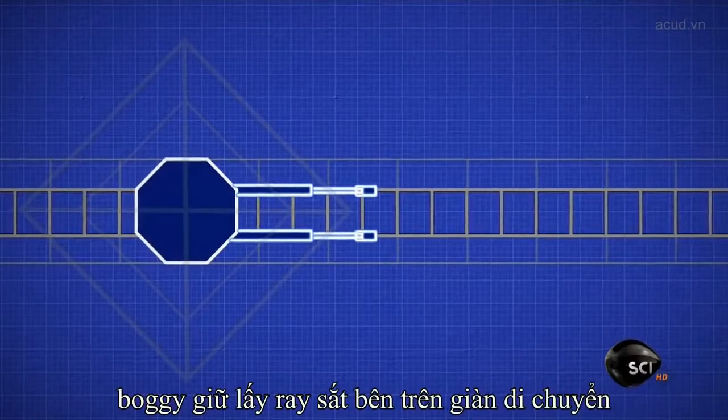Yes. Each pod sits on top of an 8-sided steel disc called a bogie, using 2 hydraulic pistons that act like arms. The bogie grabs onto rails that run atop the highway truss, pulling both itself and the pod forward. But with only a narrow 36-foot base, the trick is keeping the 100-foot wide pod in balance.

In the most simplest terms, I have a tray and a glass filled to the brim, and I'm supposed to take it right to the customer. And during that path, not a drop falls down. Cannot spill the water. Weighing more than a jumbo jet, as the pod moves along the highway truss, crews adjust 20 jacks located underneath the bogie to keep this 275-ton structure from toppling over.

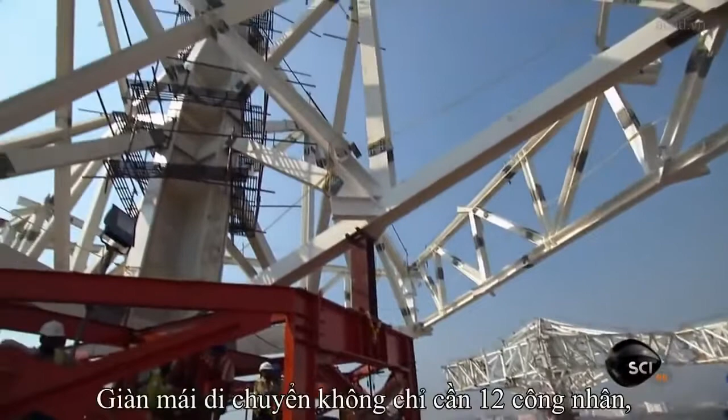Now, has this been done before? No, this is the first time that such a system is employed. In India, for sure. This has not been done in India. No. The longest pod move yet requires not only 12 workers, but, per Indian tradition, the blessing of a Hindu god.

So here on an Indian construction site, before any significant works begin, they have a ritual called a puja. And here is where they're asking the gods essentially to make sure everything goes perfectly. And part of the puja is to offer three things: a coconut for pure milk, flowers, and some sweet offerings. You can see that right here, literally sitting atop the pod. With the blessing ceremony now complete, the crew prepares to move the bogie.

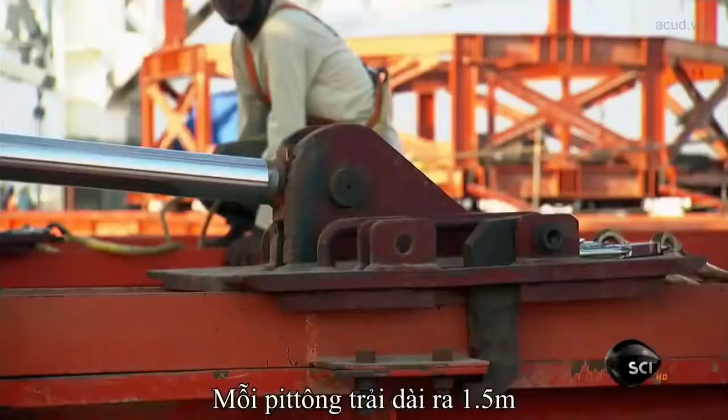Each piston extends out 5 feet, pulling with over 30 tons of force. You know, from here you can really understand exactly how this pod is traveling. Out in front, there are these 2 hydraulic pistons. They extend out, grab onto the highway truss, and then pull the pod forward. Each stroke takes 4 minutes, moving the pod just 5 feet forward. Crews repeat the process 75 times over the next 5 hours before reaching the final location.

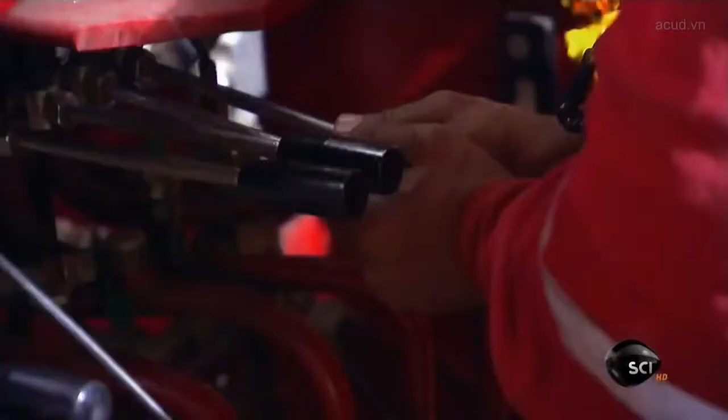We're nearing our now 5th hour of jacking this piece. We're not going to leave her till we're done. And by night's end, we will have this thing over top of the mega column. Mr. Muti, are we here? Yeah, we're almost reaching. Is the mega column underneath us right now? Yeah, exactly. That's it right there. Yes, right here. One more.

One more. Whew, we have been here all day and practically all night. This is the last and final stroke to get this pod in position, and we are done. Come on, baby, give it to us. The pod has traveled over the building to its final destination. Right. Self-standing at the end of the day. Self-standing. There you go. Mega column standing on its own, now capped with this amazing structural column, which ultimately will hold up this incredible roof. Congratulations, really. Thank you. It's an amazing night. Right. 5 hours later, the pod is home.

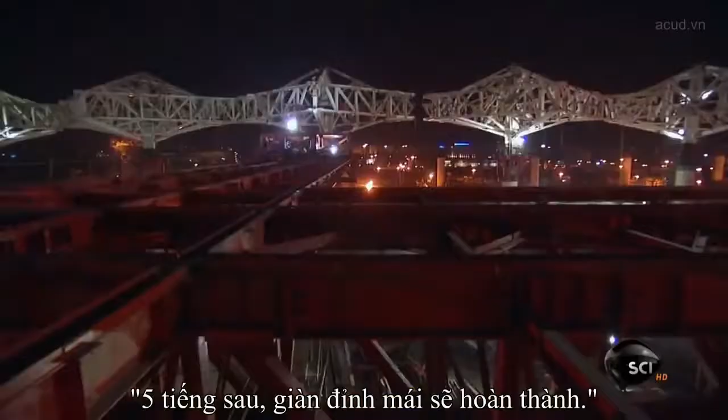These pods will soon become the linchpins of one of the most innovative airports ever built, accommodating 45 million annual passengers and bringing 750 flights here each day, laying the infrastructure for a modernizing city that will change the face of India. Tell me about the vision for this terminal.

We hope that this project will become a catalyst for change. That with all the challenges and difficulties and constraints that we had, similar to the rest of Mumbai, how we were able to deliver something which is truly world-class, something which is really unique and fantastic. That will give them hope that even the rest of Mumbai has the potential to become a world-class city.

You know, airports are really amazing building types. On the one hand, they're gigantic pieces of infrastructure, basically a parking lot for airplanes. But on the other hand, in this globalized world, they can also represent front doors to cities and really gateways to entire nations. And without question, the Chhatrapati Shivaji International Airport will be the bedrock of Mumbai's future. And if you come to Mumbai and first walk into this amazing arrivals hall, you'll be impressed by its size and its density, but you'll also be immediately aware that you are in India.